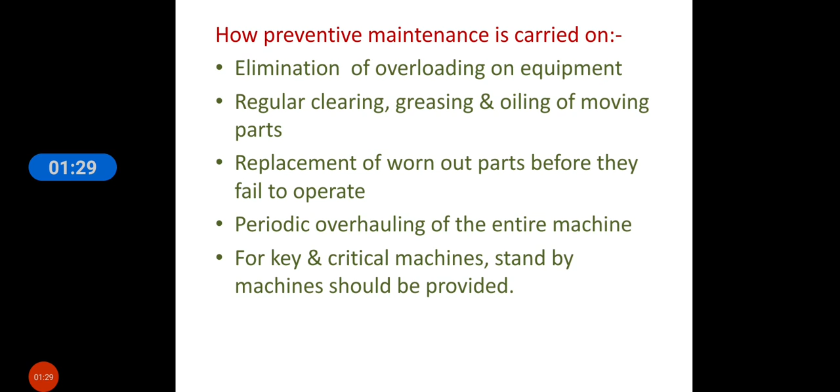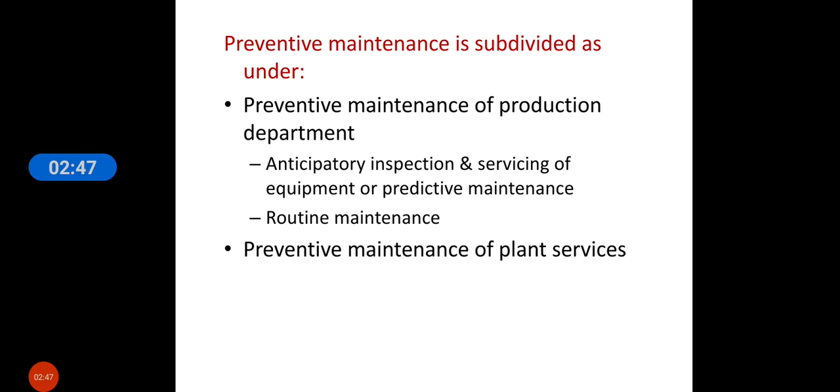Clear? So preventive maintenance is desirable than repair. It reduces repair cost. It cannot eliminate it, but it helps to reduce that particular cost. And time factor is also considered - it should take less time, and it should not reduce the time of the work. You have to take care of that.

Now, predictive maintenance. Predictive maintenance is a newer maintenance technique. In predictive maintenance, machinery conditions are periodically monitored, and this enables the maintenance crew to take timely action such as machine adjustment, repair, overhaul.

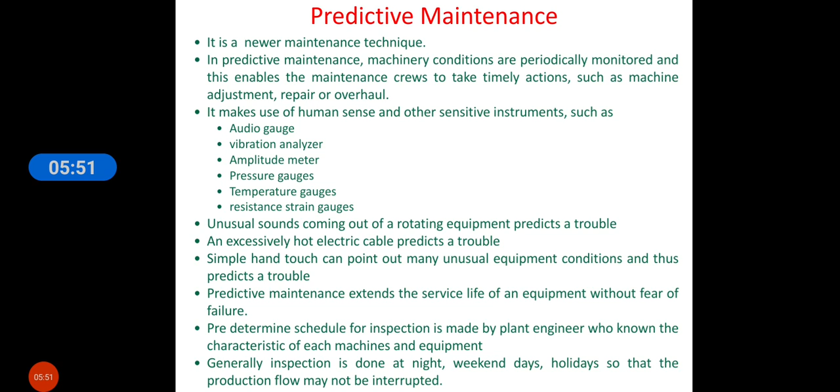हमने देखा होगा जैसे मान लो ऑटोमोबाइल सेक्टर है, मारुति है, वो आपके कुछ टाइम के लिए रेड फ्लैग वर्ड यूज़ कर लेते हैं. इट मीन्स दैट टाइम पीरियड व्हेन रेड फ्लैग इज़ देयर, वहाँ मेंटेनेंस चल रही है, वहाँ कोई प्रोडक्शन नहीं हो रहा है. और ज़्यादातर प्रोडक्शन यूनिट्स अपना मेंटेनेंस तब करते हैं व्हेन देयर इज़ नो पीक टाइम, व्हेन देयर इज़ अ हॉलीडे टाइम एक्सेट्रा.

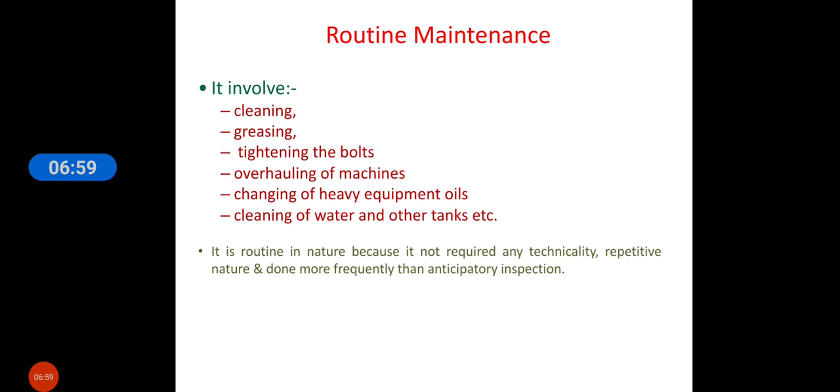Then there is a routine maintenance. Routine maintenance involves maintenance that is done on a daily basis, like cleaning, greasing, tightening the bolt, overhauling your machine, changing of heavy equipment oil, cleaning of water and other tanks, etc. It is routine in nature because it is not required any technicality or repetitive nature, and is done more frequently than any anticipatory inspection, and is generally done by your production manager or the person using that particular machine.

We don't need any specialized technical person for that particular job. Then we have planned maintenance. In planned maintenance, breakdown of the machine or equipment does not occur in a planned manner, but maintenance work can be done well in advance. Planned maintenance is also known as scheduled maintenance or productive maintenance.

Preventive maintenance is the basis of planned maintenance, and it is necessary in a flow type of production where spare capacity is limited. क्योंकि फ्लो प्रोडक्शन में अगर एक भी मशीन ब्रेकडाउन होती है तो आगे का पूरा प्रोडक्शन हॉल्ट हो सकता है. आपके पास स्पेयर कैपेसिटी अगर नहीं है तो उस टाइम प्लांड मेंटेनेंस इज़ वेरी वेरी हेल्पफुल एंड इट ले डाउन द बेस फॉर a preventive maintenance also.

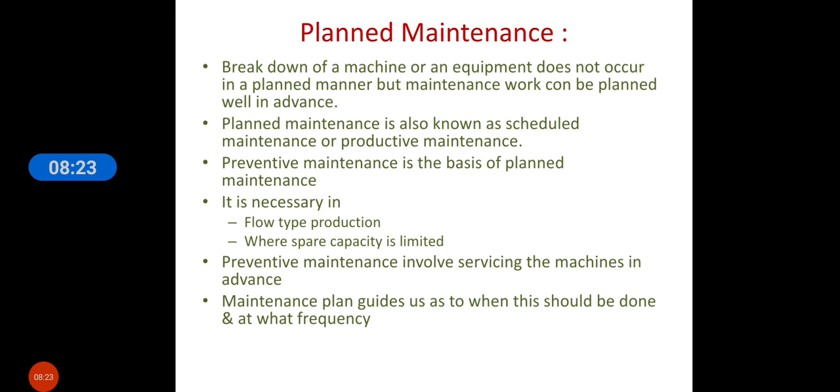Preventive maintenance involves servicing the machine in advance, and maintenance plan guides us when this should be done and at what frequency. For planned maintenance, we need to make a maintenance plan which acts as a yardstick for the maintenance department.

In maintenance plan, first of all you have to decide the work to be done. वर्क टू बी डन हैव टू बी डिफाइंड कि क्या काम आपको करना है. All work related to plant and machinery, with the help of past records, work study and industrial engineering, is estimated. And to know the frequency of routine maintenance, it is also required.

Then आपने पूरे वर्क को स्टडी करा, वर्क क्या करना है वो डिफाइन किया. Then future workload of maintenance operation is tackled by suitable method. तो जो भी आपका फ्यूचर वर्कलोड है आप वो आइडेंटिफाई कर रहे हैं एंड यू नीड टू टैकल इट. Then work study indicates the potential and capacity of maintenance staff, कि आपके मेंटेनेंस स्टाफ में कितनी कैपेबिलिटीज़ है, कितना पोटेंशियल है कि फ्यूचर वर्कलोड को वो टैकल कर सके, हैंडल कर सके.

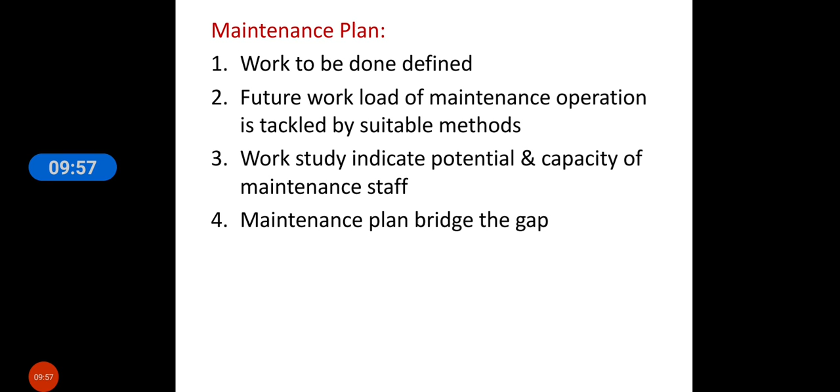फिर अगर आपके फ्यूचर वर्कलोड की रिक्वायरमेंट और प्रेजेंट कैपेसिटी के बीच कोई गैप है, if there is any gap, then you have to fulfill it in a maintenance plan. Clear? Now, maintenance planning and control.

In planned maintenance, maintenance requests emanate from production staff detailing the defects and possible rectification required. Your production department will have to send a request for the maintenance, stating what type of maintenance they need, what are the defects, and what are the possible rectifications that they need.

Then there is an asset and facility register, where there is a detailed description of each physical asset - like name, code, vendor, interchangeable parts, their technicality, their size - everything is mentioned in that asset and facility register. We can say it is a register helpful to diagnose the real cost. The register is maintained on the basis of asset classification in terms of usage, technical category and maintenance method.

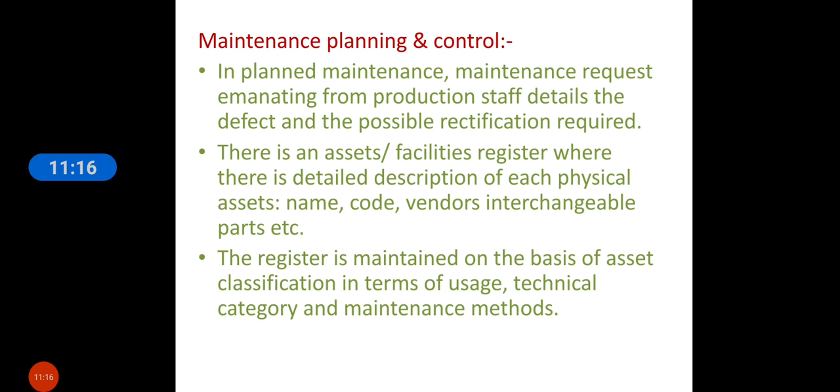Then scheduling of maintenance work. It defines time and sequence of the operation. How to do scheduling - आप ऐसा तो नहीं कर सकते कि अगर आपने मेंटेनेंस करनी है तो सबसे लास्ट मशीन की पहले मेंटेनेंस कर दी और फर्स्ट मशीन की बाद में की. नो, यू हैव टू फॉलो अ प्रॉपर सीक्वेंस.

क्योंकि अगर लास्ट मशीन की आपने पहले करी और बाद में फर्स्ट मशीन की, तो उसके साथ जो स्क्रैप या कूड़ा होता है या कोई प्रॉब्लम होती है, वो ठीक होने के बाद उस लास्ट मशीन में आ जाएगी जो आप पहले ही क्लीन कर चुके हैं. तो यू हैव टू फॉलो अ प्रॉपर सीक्वेंस एंड स्टेप, कि किसके बाद कौन सा स्टेप करना है या किस मशीन को हैंडल करना है.

एंड इट इज़ इम्पॉर्टेंट बिकॉज़ ऑफ ऑप्टिमम यूज़ ऑफ हाईली पेड मेंटेनेंस स्टाफ. आपका जो मेंटेनेंस स्टाफ है हाईली पेड, उसको ऑप्टिमम यूटिलाइज़ करना है. अगर आप वेल प्लान और शेड्यूल के साथ चलेंगे तो यू कैन. Then equipment can be utilized effectively, and you can reduce the interruption in production flow. आप शेड्यूल बना सकते हैं नाइट का, वीकेंड डे का, हॉलीडेज़ का, ताकि आपका प्रोडक्टिव टाइम रिड्यूस ना हो. एंड इट रिड्यूसेज़ द चांस ऑफ सडन ब्रेकडाउन एंड इक्विपमेंट फेलियर ऑल्सो.

It facilitates a proper sequence of maintenance services. Then after maintenance, an inspection report is produced. Other historical records related to maintenance are made manually or by electronic data processing for better planning. It reduces emergency cases up to 90% and also sets work priority.

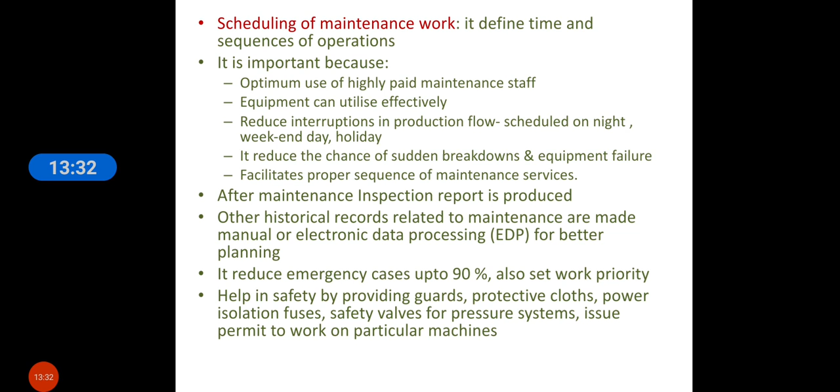And it also helps in safety by providing guards, protective clothes, power isolation fuse, safety valve for pressure system, and issuing a permit to work on a particular machine. Then cost control of plant maintenance. In the maintenance plan you have to include all these things.

Now how to control the cost of the plant? Basically it is most important and should be at the lowest possible cost. It is based on the budget, and the budget depends on many management policies like over maintenance or under maintenance. But management has to be very cautious while deciding the maintenance cost.

क्योंकि under maintenance होगा it reduces the cost but it increases the chance of breakdown. And if over maintenance is done, it increases the cost, the over consciousness of maintenance at high cost here.

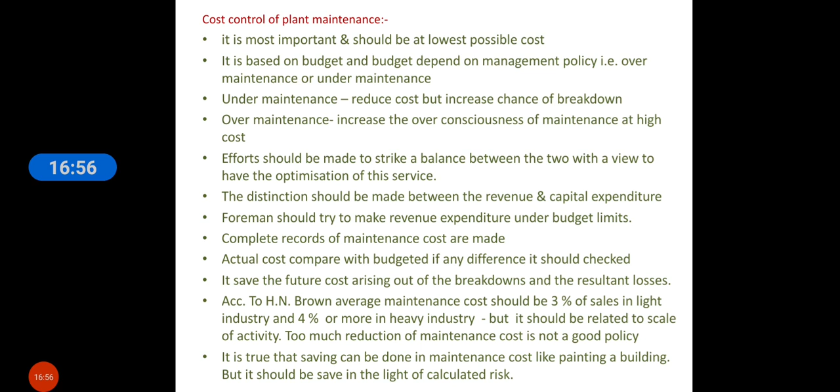Okay, so that overall cost is reduced, and machine breakdown chances will also reduce, and the productive life of the machine will be increased. Clear? With the help of this equilibrium, you come to know about the optimum size of the maintenance cost. Clear, students? Hope you understand this.